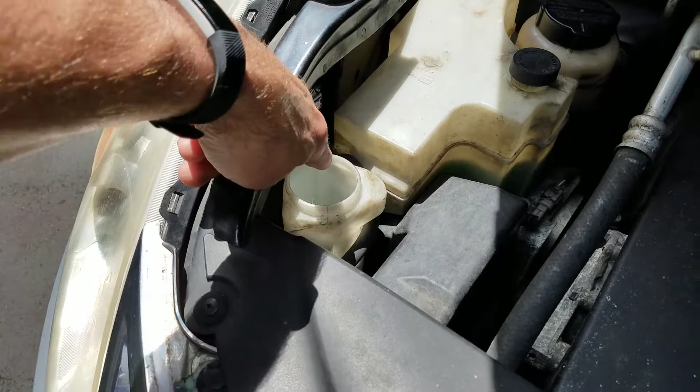Behind me we've got my daughter's Nissan Murano, and it was missing a cap. I'm going to show you real quickly how easy it was to make the replacement part using Tinkercad and a 3D printer. I have no clue how I managed to misplace this, and I'll take the blame since I'm the one that does most of the maintenance on the car.

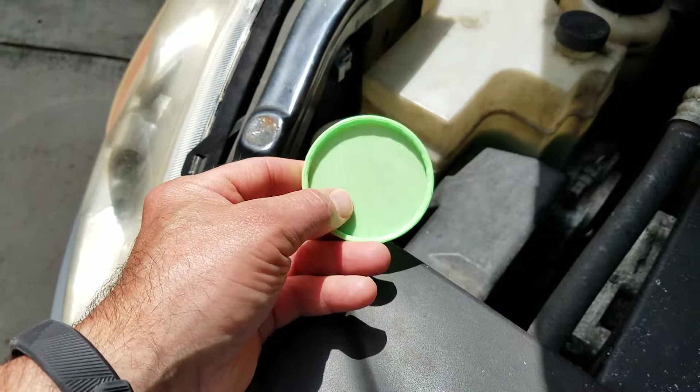It is gone, so I came out and measured and found out it was 58 millimeters. Once I had that size, I took the tube and gave it a 2 millimeter diameter, and then lifted it up 5 millimeters off the edge of the base. Check this out — snaps on just like you'd expect it to.

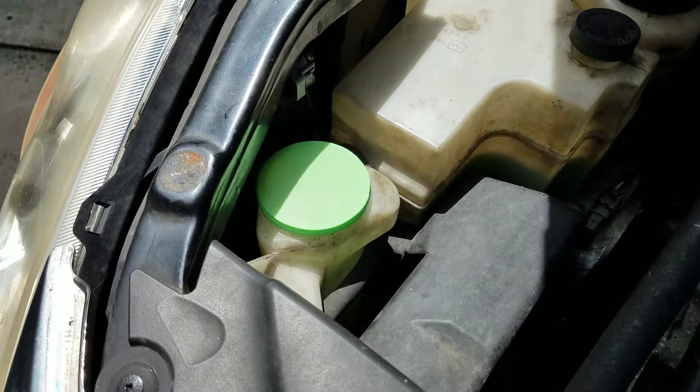I'm going to make another version and post it on Thingiverse with a little wiper fluid label. It took me about 30 minutes and 2 tries because the first time I didn't have the ridge long enough. But it is that easy to create your own parts for your cars.

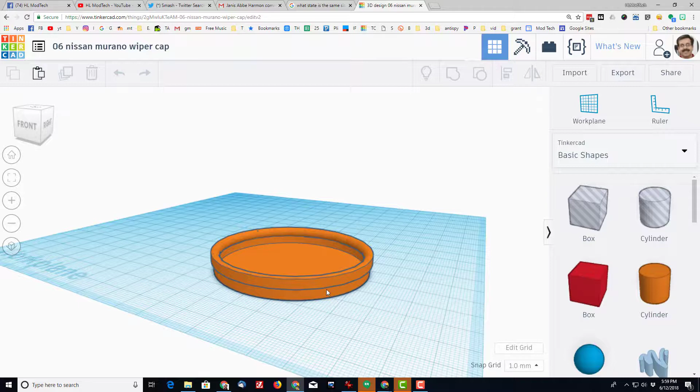Alrighty, so let's check out how that design was created. Once again, I was in Tinkercad, and I simply took a cylinder and a tube and grouped them. Then I took an extra cylinder, which I'll hide, to cut off the outside edge, which gave it the nice lip so that it stays attached.

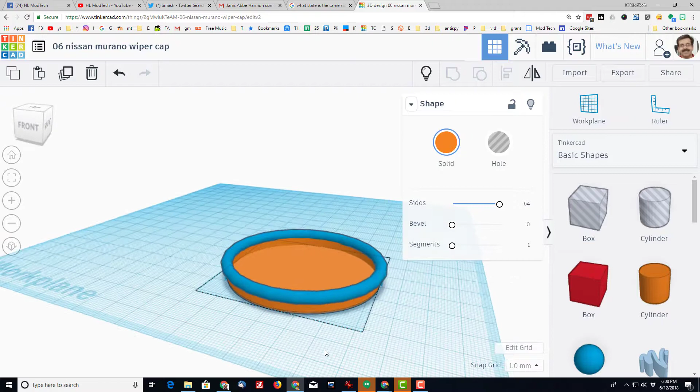You can see down here, the very top of my design was only 0.5 millimeters thick. I'm going to change that now to 1 millimeter thick because it is in permanent fashion — I was just testing it then.

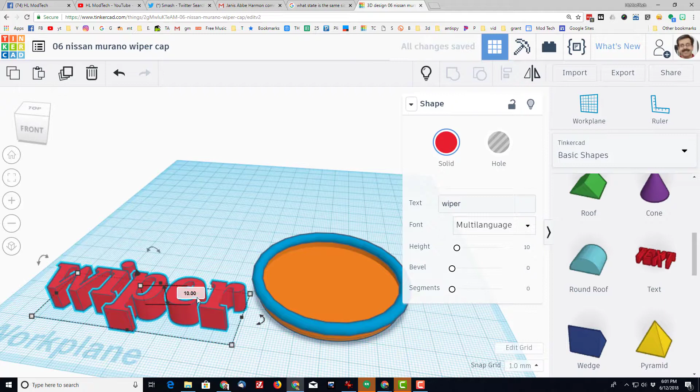As a nice classy touch, I'm going to add the word 'wiper fluid' to it. What's kind of slick about this is I'm going to cut it out 0.25 millimeters so it'll cut it in. I'll just shrink it so it fits in these 2 directions, that way I'm not changing that 0.5 height.

I'm going to make it a hole, and then invert it so that when you put the cap on, it's actually right side up. Now I can just move it into place.

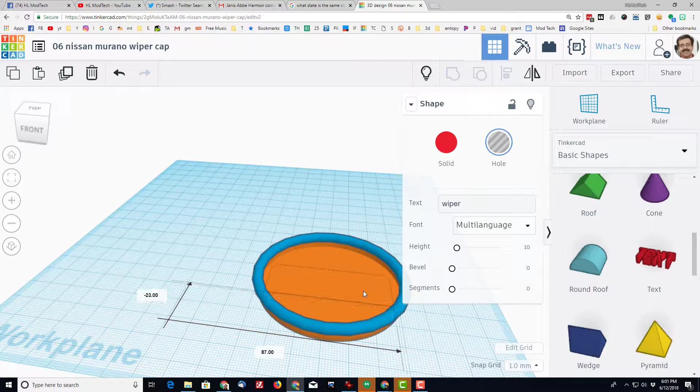Grab everything, and once again I'm going to center it one more time. Now when I group my entire project, including the hidden parts, we are back in business. And we've got a cool cap that's a little bit thicker and says wiper fluid underneath.

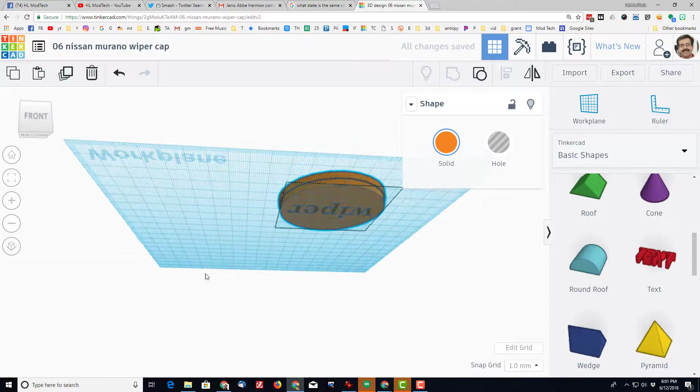And that, my friends, is how I created this cool project using Tinkercad.